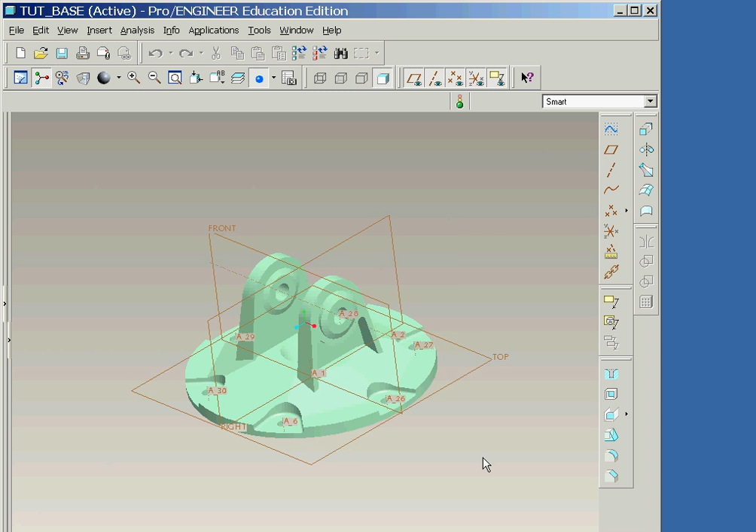Notice that the model is spinning about the red, green, blue triad, which is called the spin center. We'll now click the spin center icon in order to turn it off.

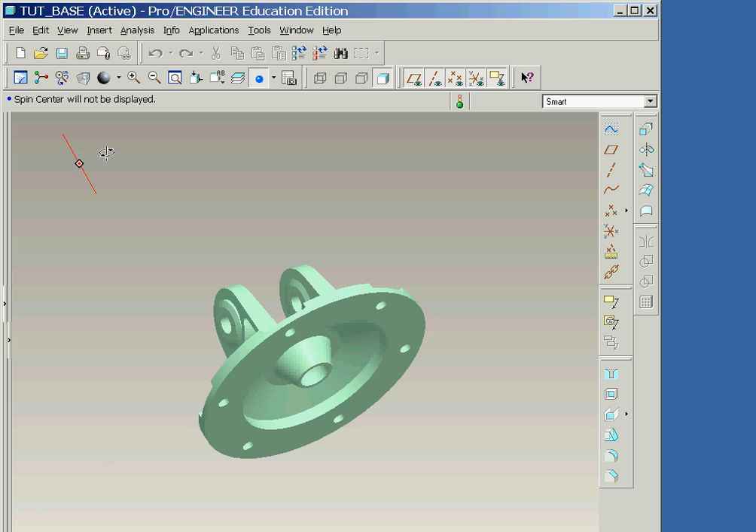And then again, spin the model by clicking the middle mouse button and dragging the mouse. Notice that the model is now spinning about the location where the cursor was positioned when the middle mouse button was depressed.

Another very interesting viewing option is available by clicking on the Orient Mode icon. When this icon is clicked on and we click the right mouse button, we see the pop-up menu shown here. We'll now select the Velocity option.

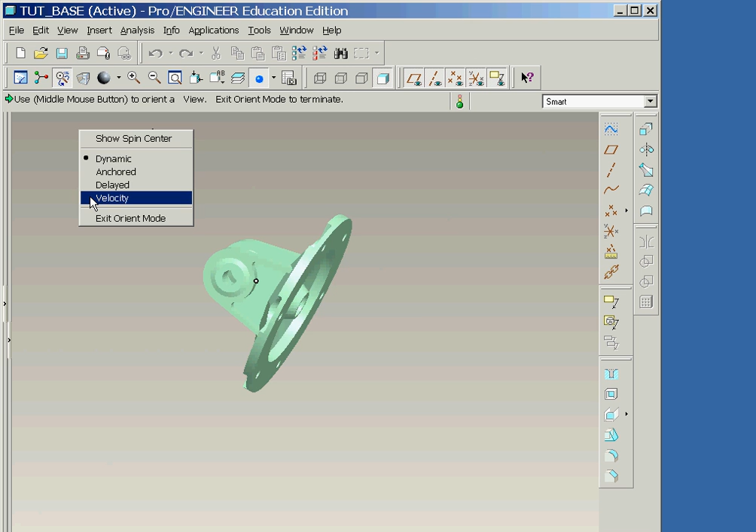And then again hold down the middle mouse button and drag the mouse a small distance. As you can see, the model will continue to spin as long as the middle mouse button is depressed.

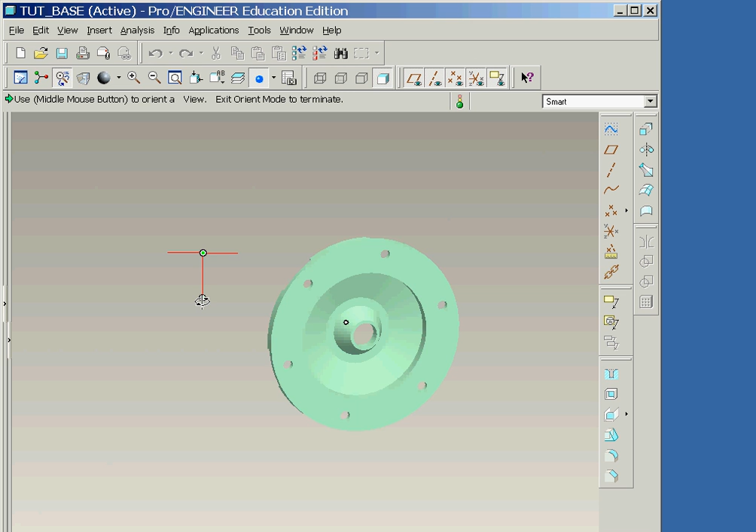In addition to the dynamic orientation illustrated here, there are several predefined views that are available by clicking on the Saved View List icon. As you can see, these views correspond to common views found in engineering drawings.

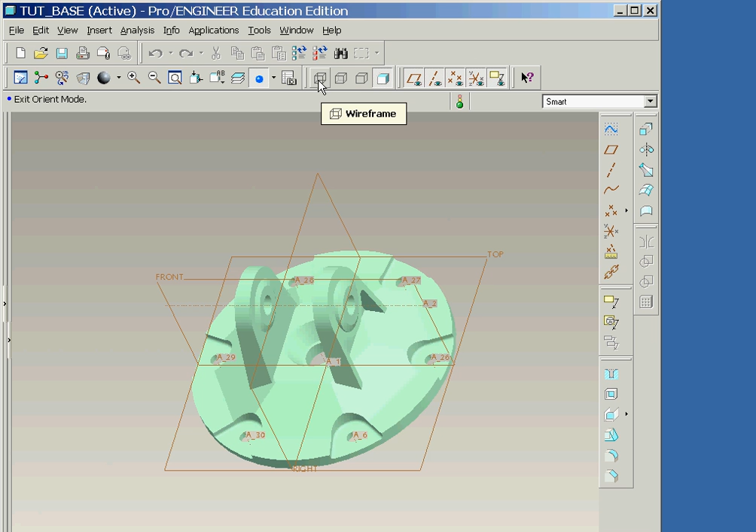In addition to changing the orientation, we can quickly change the display mode by clicking on the Wireframe icon, or the Hidden Line icon, or the No Hidden icon.

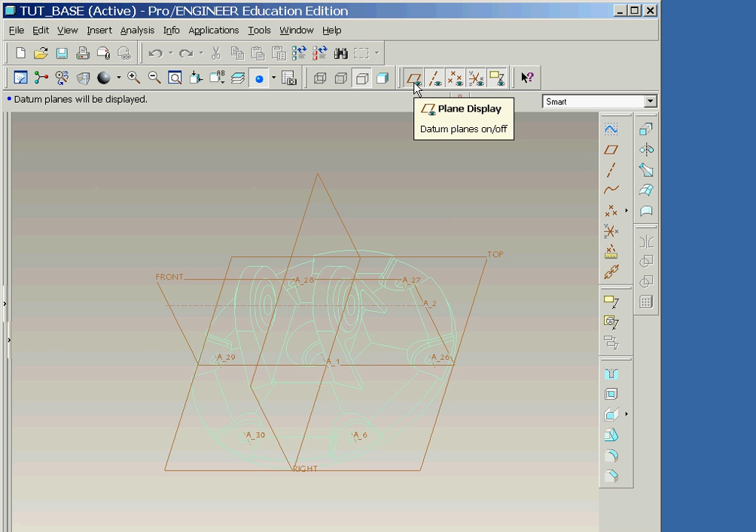In addition to the physical part, our current display contains datum planes and datum axes. Sometimes we will want to temporarily remove these datums from the display.

We can toggle these on and off by using the icon shown here, or by using the commands View, Display Settings, Datum Display, and then clicking on the check box next to the item we wish to remove from the display.

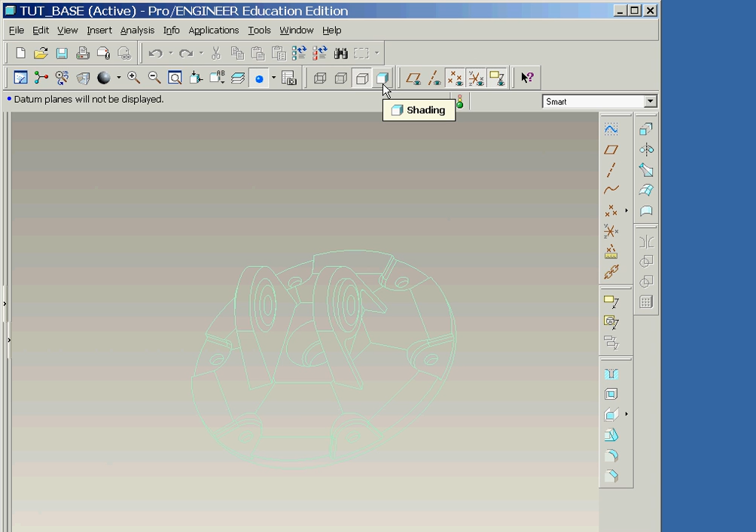As we will find in the subsequent lessons, the creation of parts in Pro-E is accomplished by constructing a series of features. A list of features used to create a part is displayed in the model tree, which we'll open now, by opening the Navigator pane and making sure that the Model Tree tab is selected.

As you can see, as we click on a feature in the graphics window, the feature's name is highlighted in the Model Tree window.

We can also click on a feature's name in the model tree and see the corresponding geometry highlight in the graphics window.

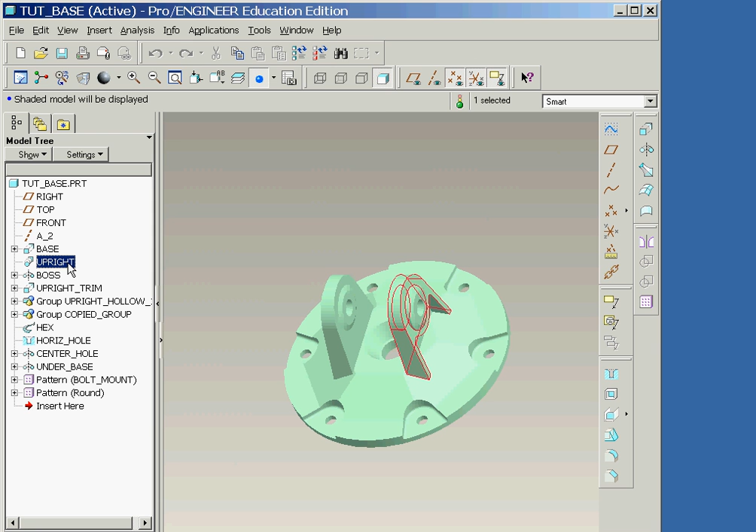Another useful technique that can be used to examine a Pro-E part is the Model Player option, available on the Tools pull-down menu.

This option allows us to rewind back to the beginning of the creation of the part and then step through the construction process.

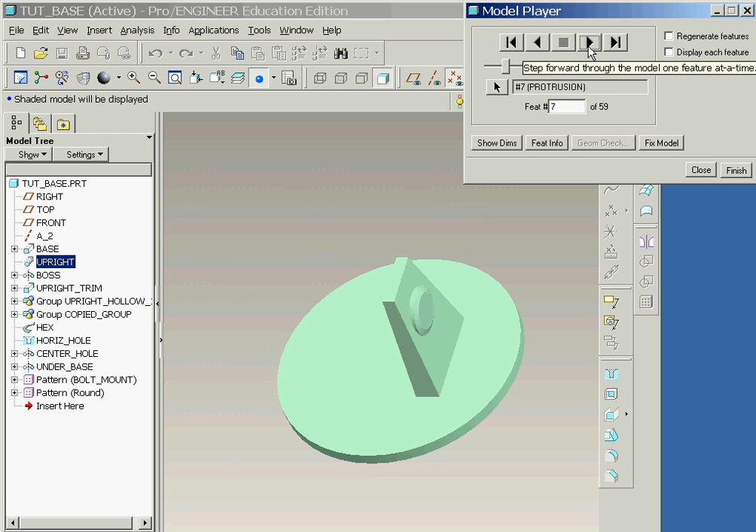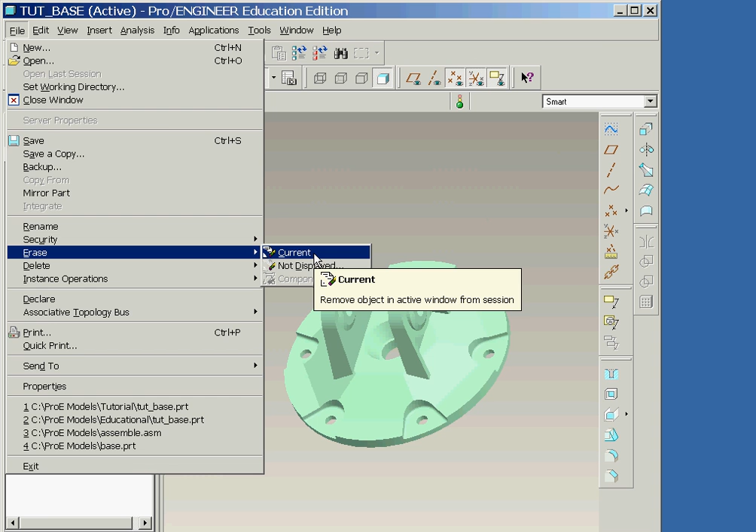In addition to creating individual parts, Pro-E allows several parts to be combined into an assembly. In order to examine a sample assembly, we'll first remove the current part by using the commands File, Erase, Current, and then use the commands File, Open.

Followed by selecting the assembly file, Tut Widget. Now, in order to better illustrate the different parts that are contained in our assembly, we'll use the commands View, Explode, and then Explode View.